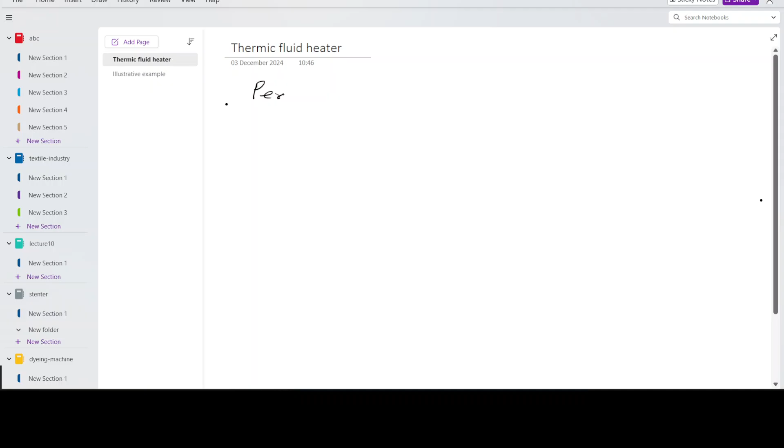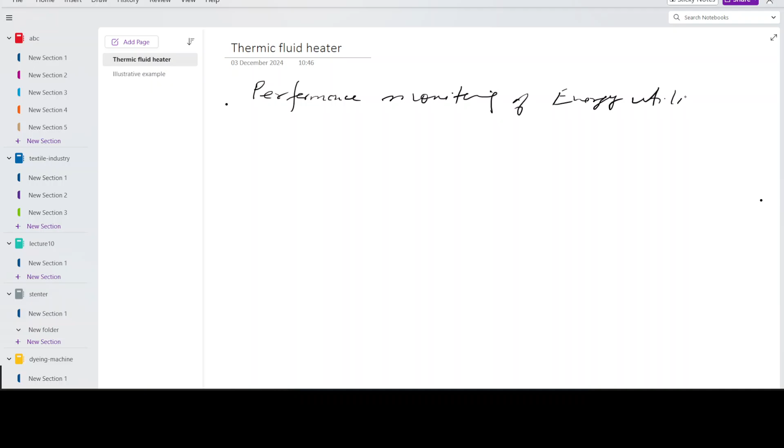Today we will begin performance monitoring of energy utilities in textile industry.

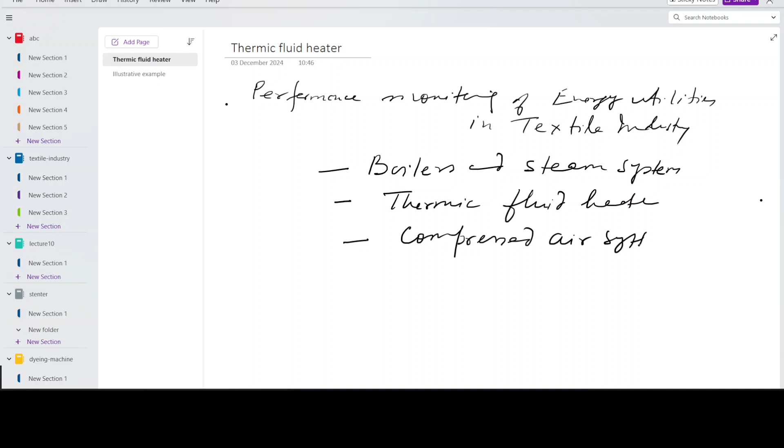Major energy utilities of textile industries are boilers and steam system, thermic fluid heater, compressed air systems, and humidification system.

Here in detail we will read about thermic fluid heater and humidification system. Today we are going to cover thermic fluid heater.

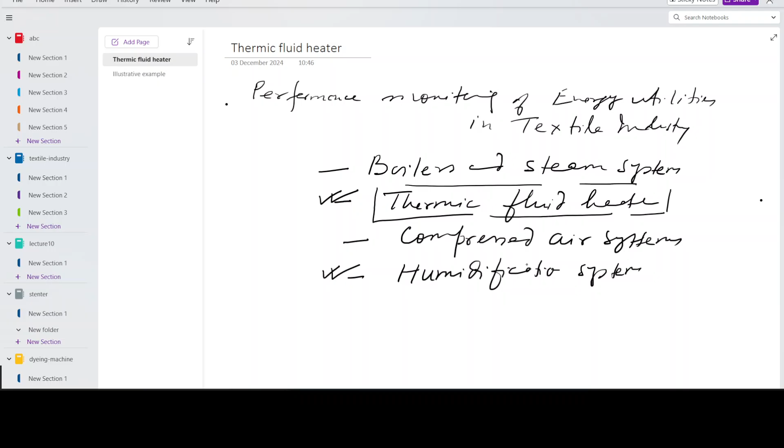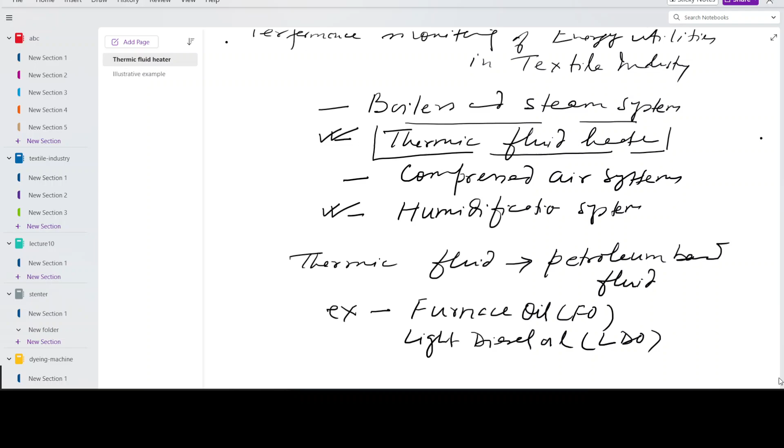What is thermic fluid? Thermic fluid is petroleum based fluid. Examples are furnace oil, light diesel oil, heavy fuel oil, and Hindustan Petroleum HP markets

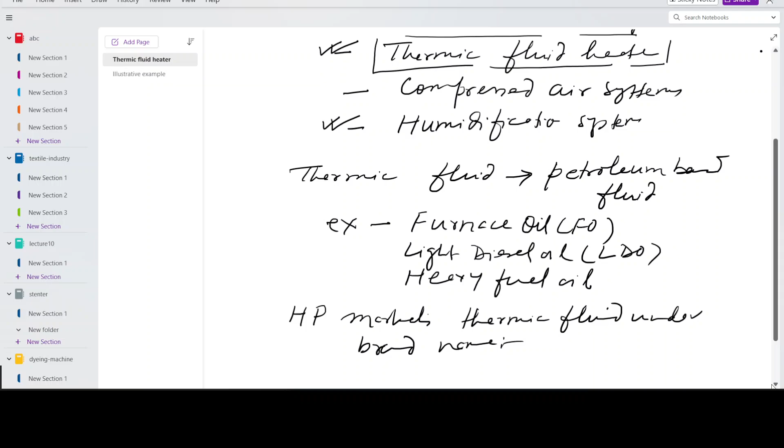thermic fluid under brand name Hytherm 500 and Hytherm 600. Hytherm 500 has maximum bulk oil temperature up to 290 degrees centigrade, and Hytherm 600 has maximum bulk temperature 320 degrees centigrade.

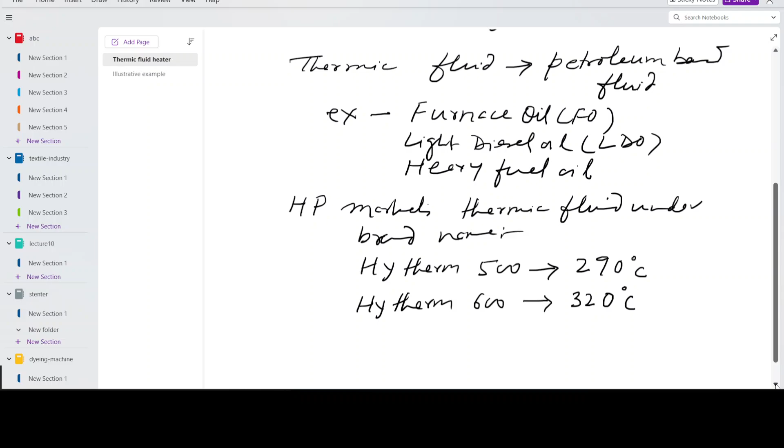This is about thermic fluid. Now we come to thermic fluid heater.

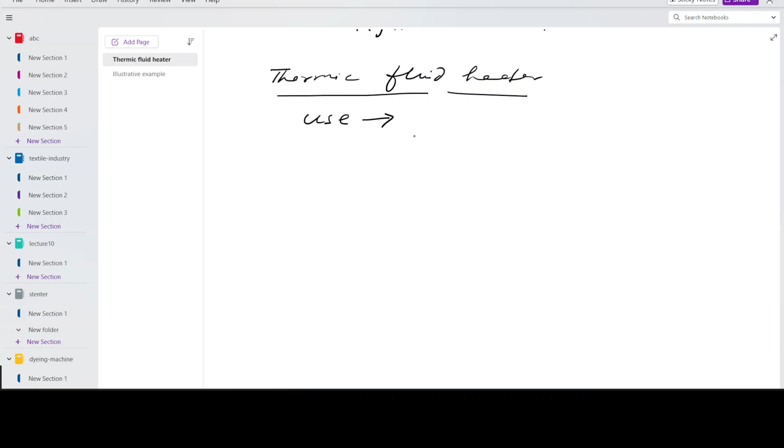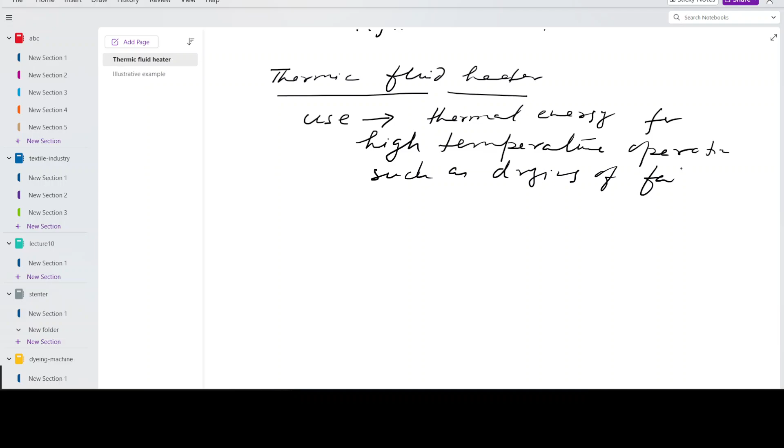Let us see its use first. Thermic fluid heater provides thermal energy for high temperature operation such as drying of fabric in stenter after dyeing operation in wet processing.

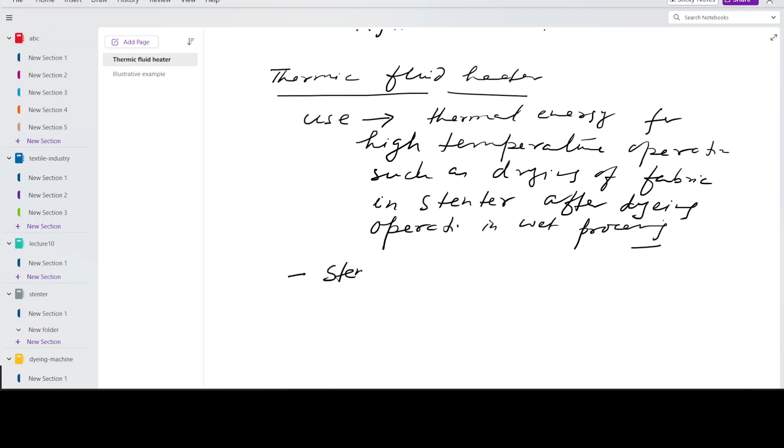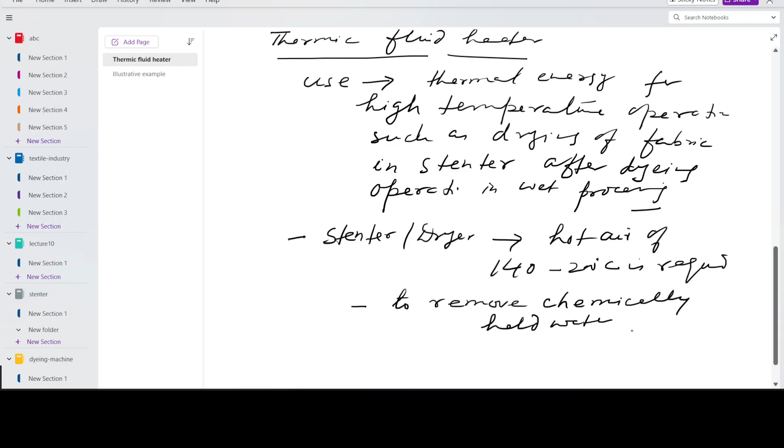In a stenter or dryer, hot air of 140 to 200 degrees centigrade is required. This may be for purpose to remove chemically held water from the textiles by evaporation, or physically or chemically set the textile material.

Now let us see the working principle of thermic fluid heater.

There are four stages. First is combustion, the combustion chamber generates heat.

Second is heat transfer. This heat generated from combustion is transferred to the thermic fluid flowing in coils or pipes surrounding the combustion area.

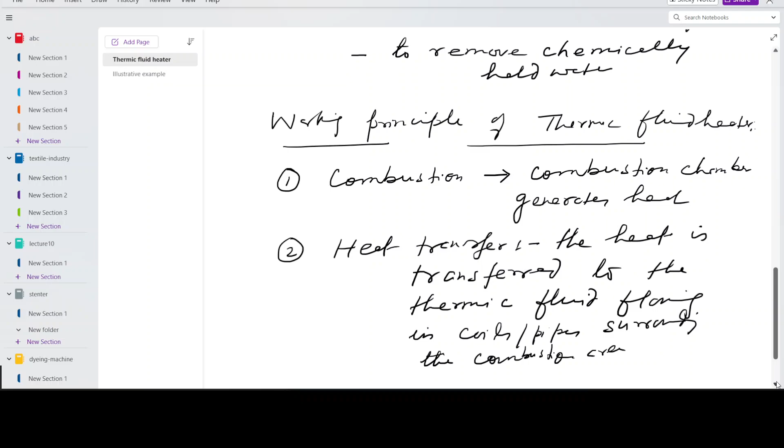Here, cold thermic fluid will enter and it will get heated in the combustion area. And third is circulation.

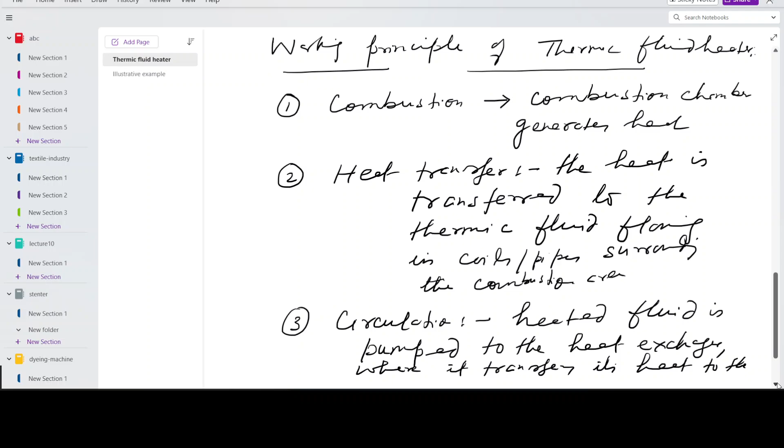Heated thermic fluid is pumped to the heat exchanger where it transfers its heat to the process,

and lastly it returns. Cooled fluid returns to the heater for reheat.

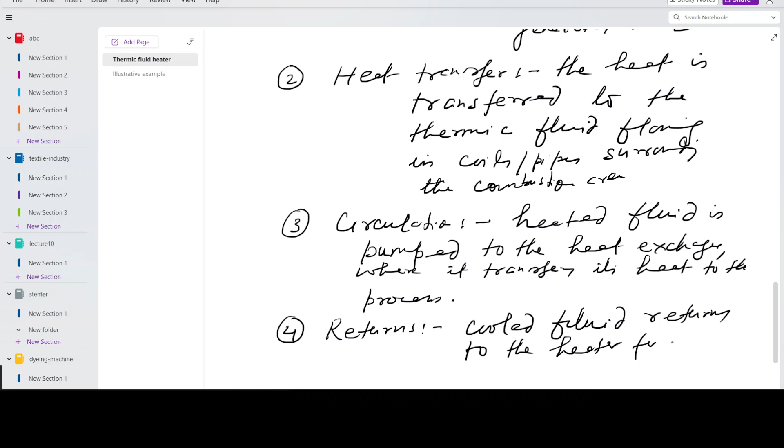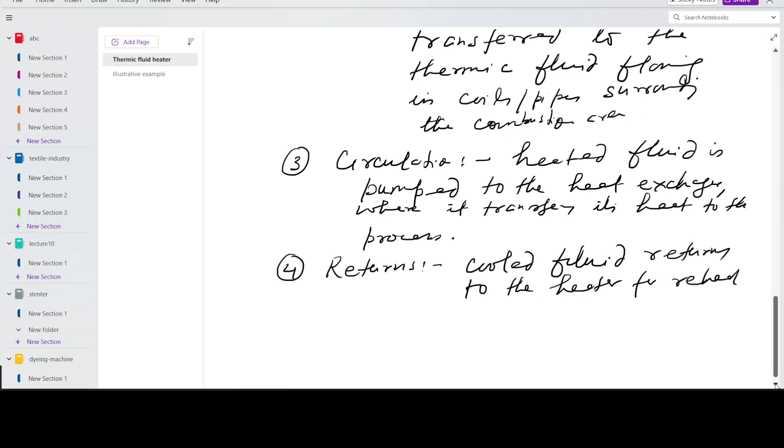Thus we see that this is a closed cycle operation, and as we know the efficiency of a closed cycle operation is always greater than steam boiler for the same purpose.

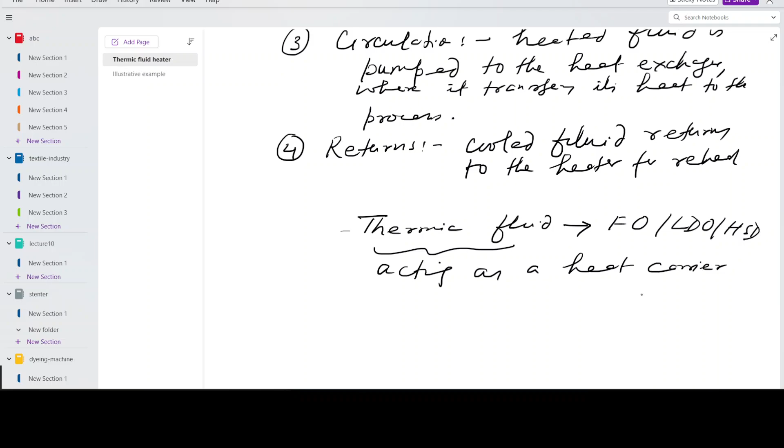I am explaining what we have seen in the working principle, just repeating those things. This thermic fluid is heated up in heater and circulated through the user equipment, and it transfers heat for process through a heat exchanger, and finally fluid returns to the heater. So this is a 4-step process we have seen.

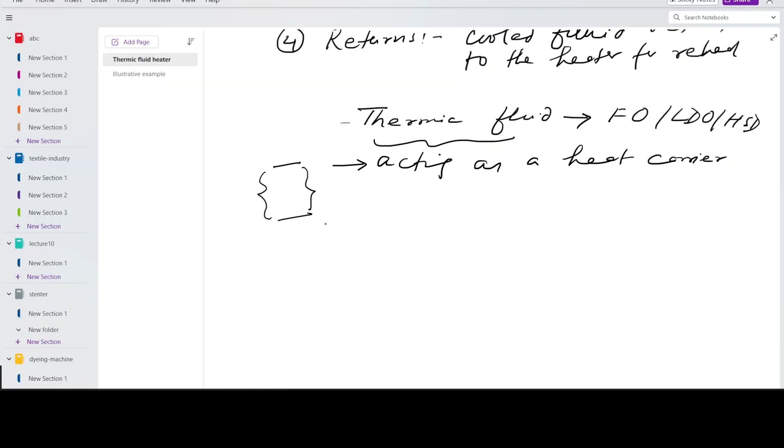First is combustion, then heat transfer, then circulation, and finally return.

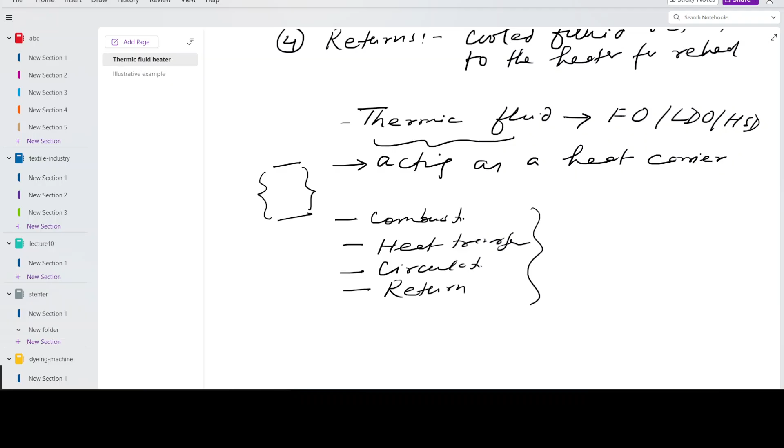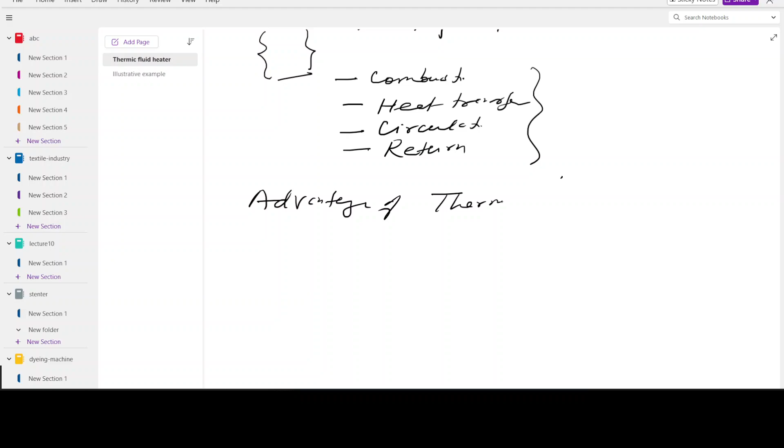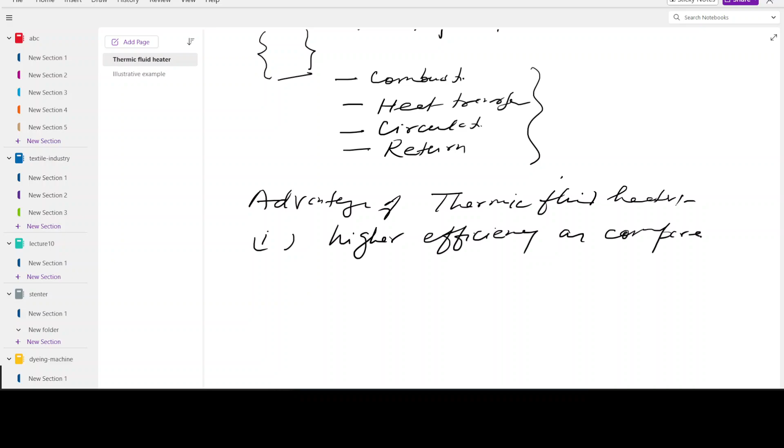What are the advantages of thermic fluid heater? First is it has higher efficiency as compared to steam boiler. Reason is obvious, because it is a closed loop operation.

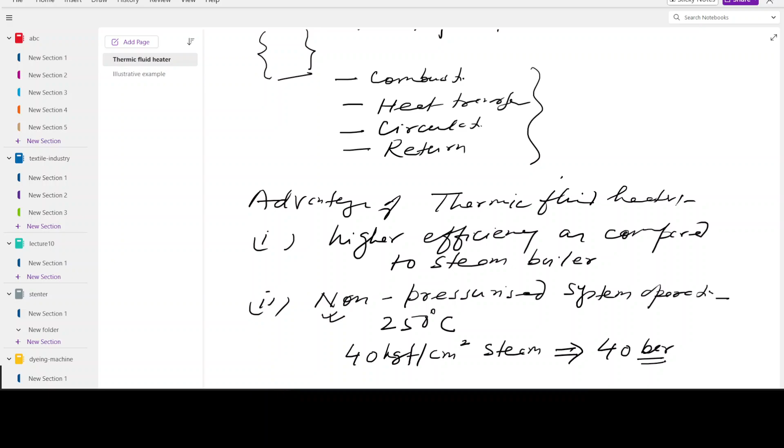Second important thing is non-pressurized system operation. Temperature around 250 degrees centigrade can be achieved through non-pressurized system operation, and the same operation in steam system will require 40 kgf per centimeter square steam, that is pressure of 40 bar, and here in thermic fluid heater it is non-pressurized system operation at 250 degrees centigrade, and this is for boiler. So it is advantage here, no extra pressure is required.

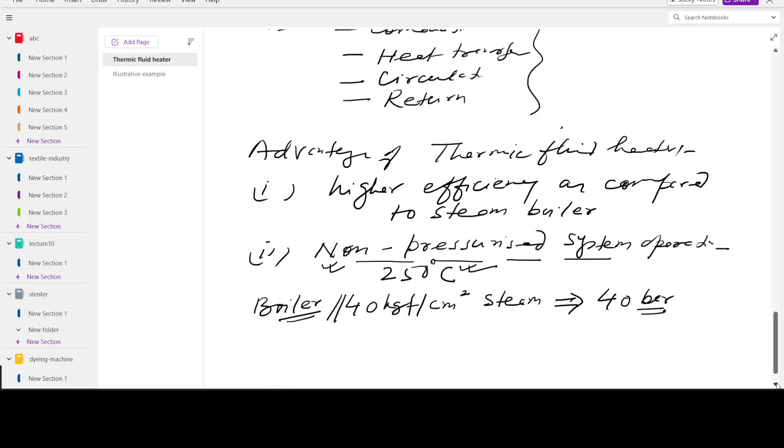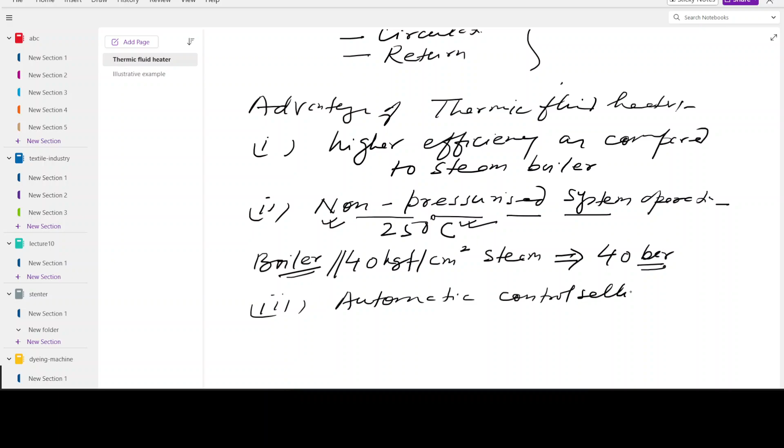And third important thing is automatic control settings. We can maintain desired temperature for desired time.

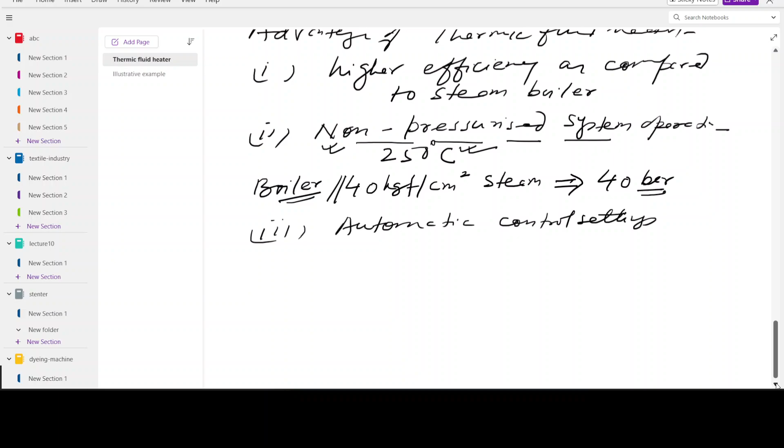We have just seen the operating principle of thermic fluid heaters and its advantages over steam boiler. Now coming to efficiency.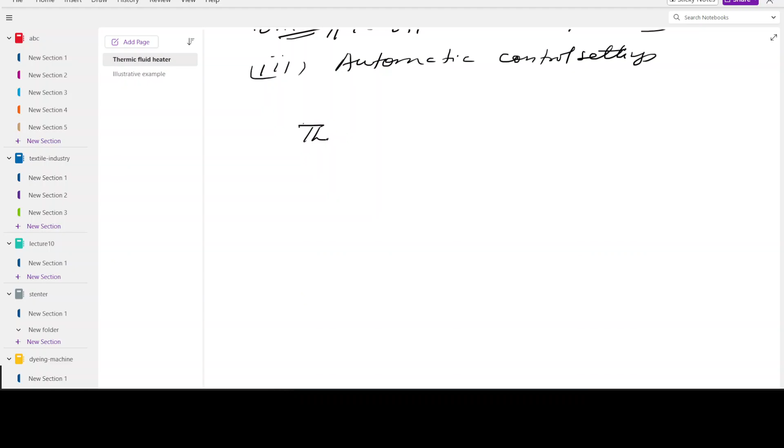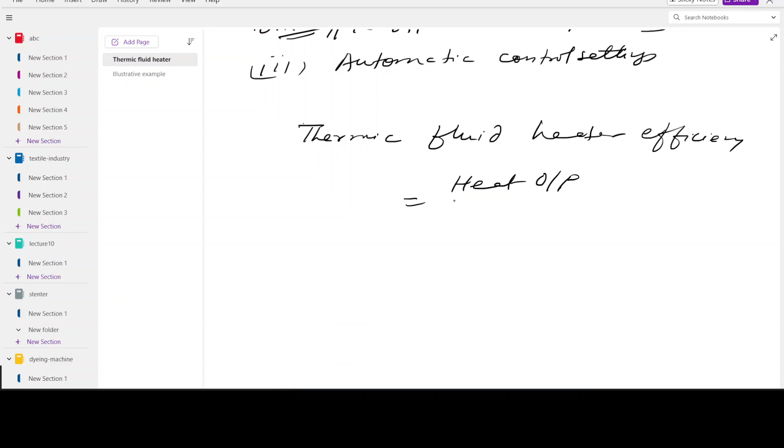Thermic fluid heater efficiency is equal to heat output divided by heat input, simple one, multiplied by 100 for percentage.

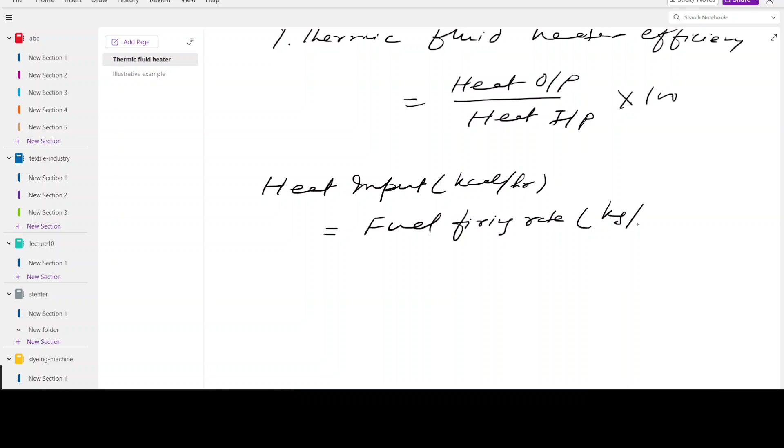And now let us see both these terms. Heat input, kilocalorie per hour, this is the unit. This is equal to fuel firing rate, how many fuel is getting fired per hour, and gross calorific value of fuel, this is in kilocalorie per kg. Thus we have found out heat input.

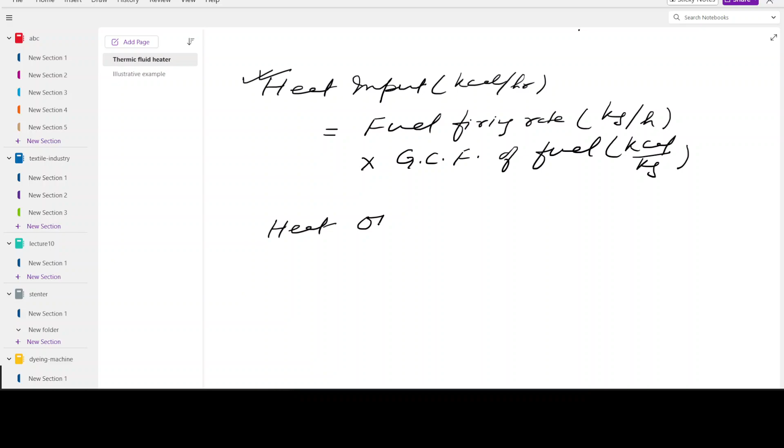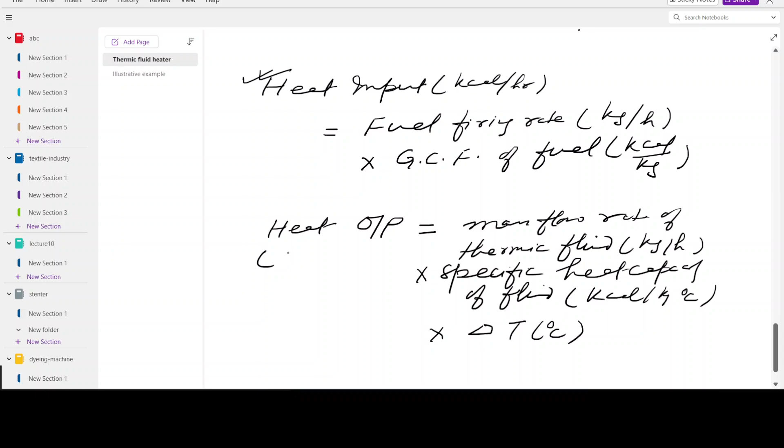This is the formula that will be used for heat input, and for heat output, heat output is mass flow rate of thermic fluid in kg per hour into specific heat capacity of fluid, its unit will be kilocalorie per kg per degree centigrade, and temperature difference in degree centigrade. So its unit will be kilocalorie per hour.

Now we have heat output, heat input, and so we can find out thermic fluid heater efficiency. With this information, we can find out thermic fluid efficiency. Now we will see its application through an example.

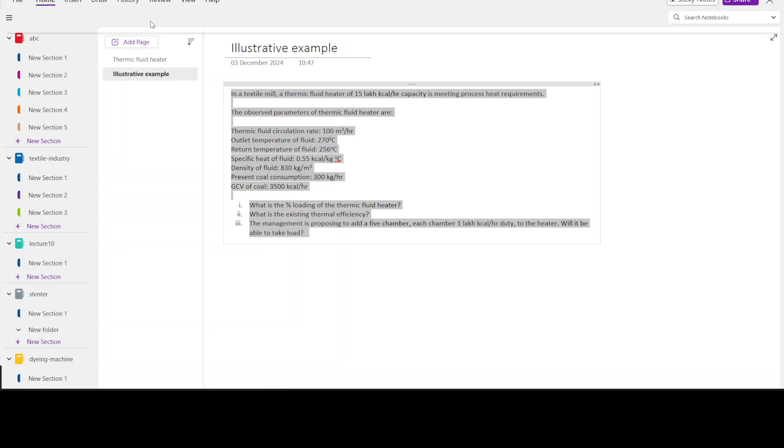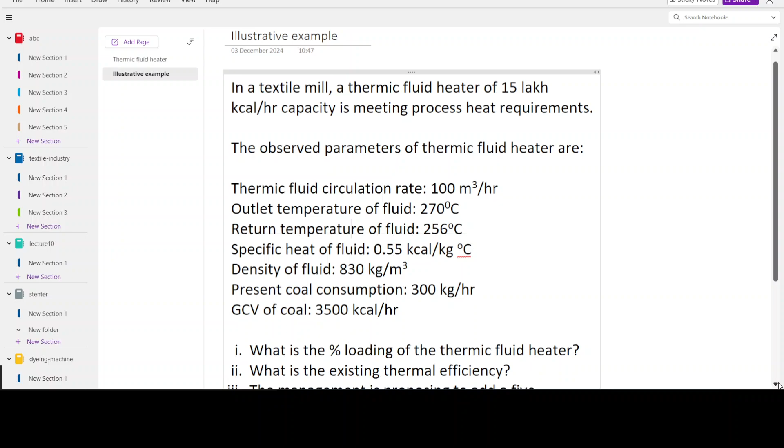Here we have a question. Just I am increasing its font so that you can see it clearly. The question is, in a textile mill, a thermic fluid heater of 15 lakh kilocalorie per hour capacity is meeting process heat requirements. Here the capacity of fluid heater is given. The observed parameters of thermic fluid heater are: circulation rate is given as 100 meter cube per hour.

We have volume per hour, outlet temperature of fluid and return temperature of fluid. We can find out delta T here, 270 minus 256 degree centigrade. Specific heat of fluid Cp is given here, and density of fluid has been given here.

Using this volume per hour and density, we can find out mass flow rate, which is equal to volume per hour into density. For finding heat output, we will need mass flow rate, which we can find out very easily here. Specific heat of fluid is already given and temperature difference is already given, so we can find out heat output very easily.

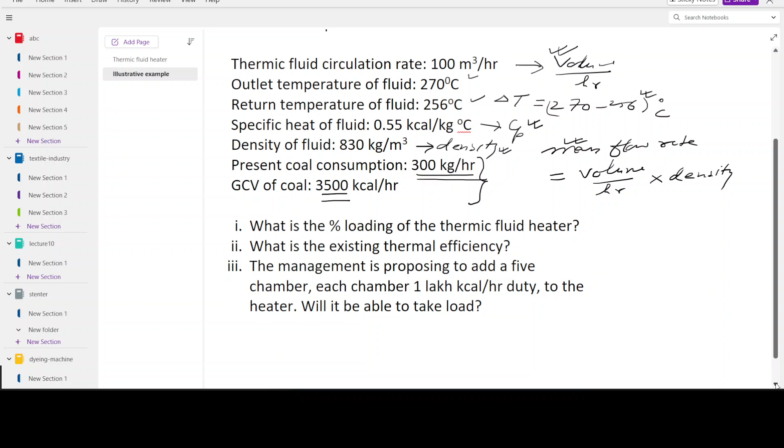We have been given coal consumption 300 kg per hour, that is the fuel firing rate, and gross calorific value of coal is also given. So we will find out heat input also. Now we are in a position of finding heat output and heat input both. First question is asking what is the percentage loading of the thermic fluid heater? We can find it out very easily.

First of all, find out heat output. Heat output is equal to mass flow rate into specific heat capacity of fluid and temperature difference. Mass flow rate is given: volume per hour 100 meter cube per hour into density 830 kg per meter cube. We have found out mass flow rate. Specific heat capacity given is 0.55 kilocalorie per kg per degree centigrade, and temperature difference is also given here, 270 minus 256.

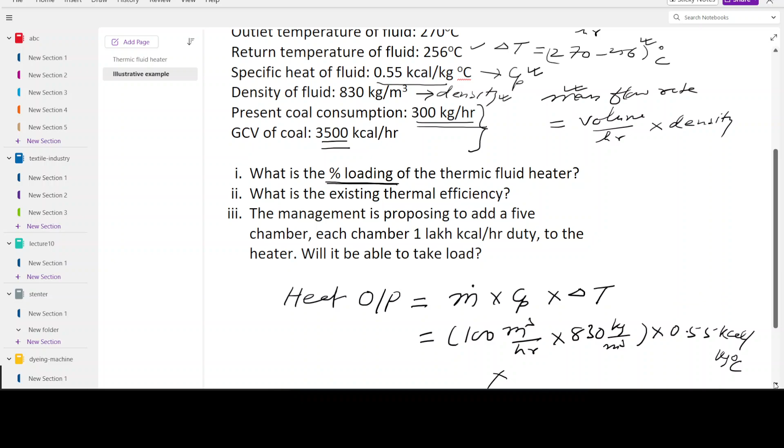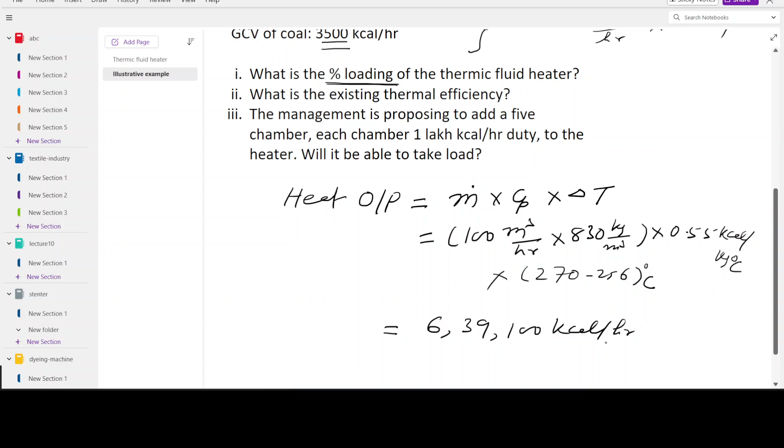When we multiply it, this comes out to be 6,39,100 kilocalorie per hour. We have found out heat output. Percentage loading is equal to heat output divided by capacity of thermic fluid heater.

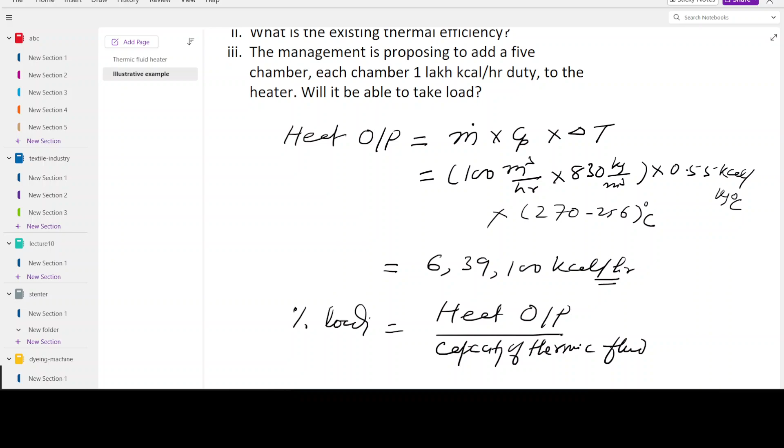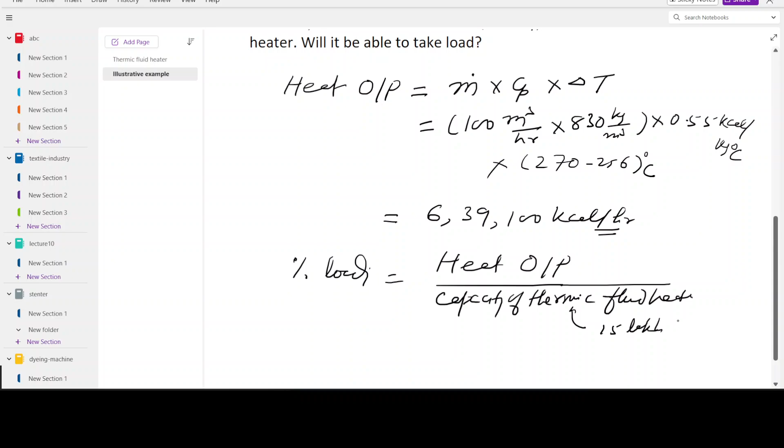In the very beginning of the question, capacity has been given as 15 lakh kilocalorie per hour. You can see this is the capacity, 15 lakh kilocalorie per hour. So put these two values: kilocalorie per hour divided by 15 lakh kilocalorie per hour, multiplied by 100 for percentage. This comes out to be 42.60%.

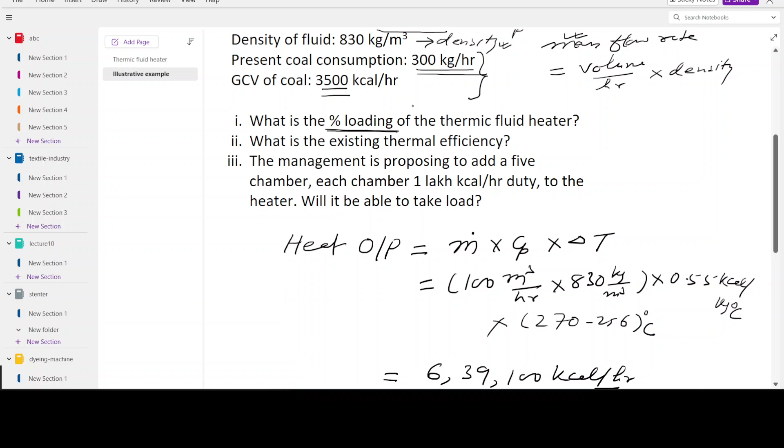Second question: what is the existing thermal efficiency? For thermal efficiency, we have already found heat output is equal to 6,39,100 kilocalorie per hour. We have to find heat input. Heat input is fuel firing rate, which has been given as 300 kg per hour, and gross calorific value of coal, which has been given as 3500 kilocalorie per kg.

This comes out to be 10 lakh 50,000 kilocalorie per hour. So we have both heat output and heat input. Efficiency of the heater is equal to heat output by heat input. This will come out to be 6,39,100 divided by 10,50,000.

Units are kilocalorie per hour divided by kilocalorie per hour. We will multiply by 100 for percentage efficiency. This will come out to be 60.86 percentage. We have found out efficiency. The third part of the question says the management is proposing to add 5 chambers, each chamber 1 lakh kilocalorie per hour duty, to the heater.

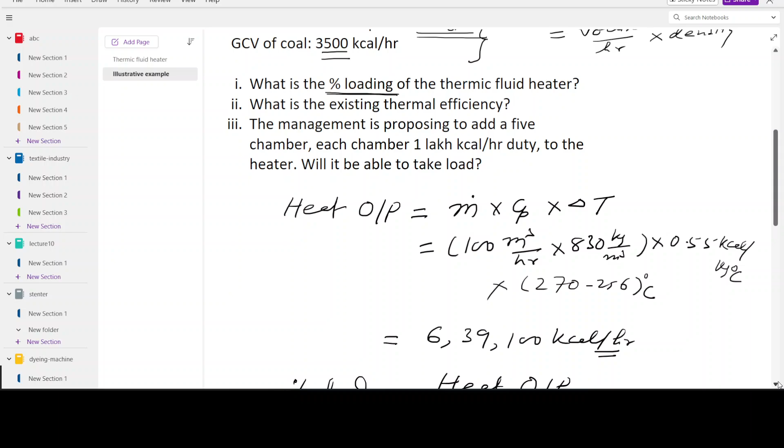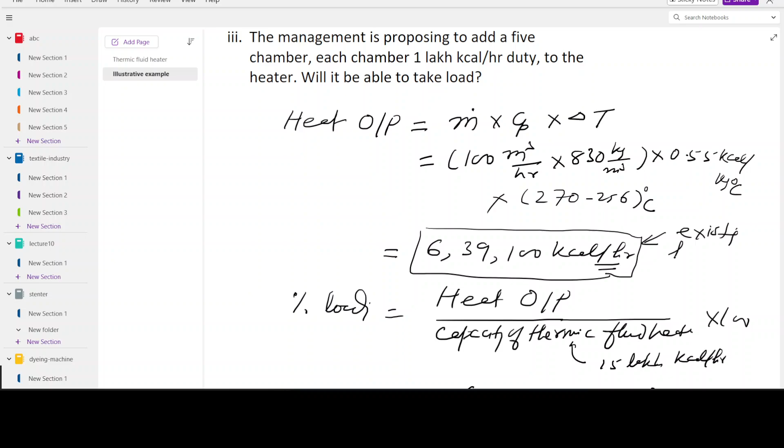Will it be able to take the load? Existing load is 6,39,000, this is the existing heat load. Apart from that, management wants to introduce 5 heat chambers of 1 lakh kilocalorie per hour capacity each. So this is the additional heat load.

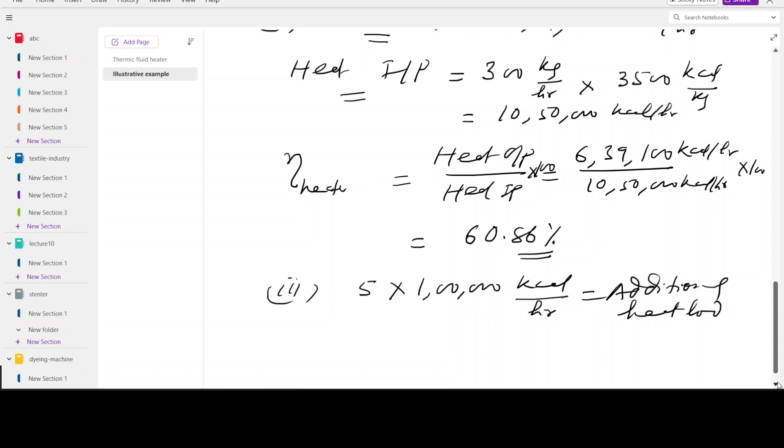So total heat duty with the new loading is equal to the existing load plus 5 lakh, these two components, in kilocalorie per hour. This comes out to be this much. And as the capacity of the thermic fluid heater is 15 lakh kilocalorie per hour, it will be able to take the load. The answer is yes, it will be able to take the load.

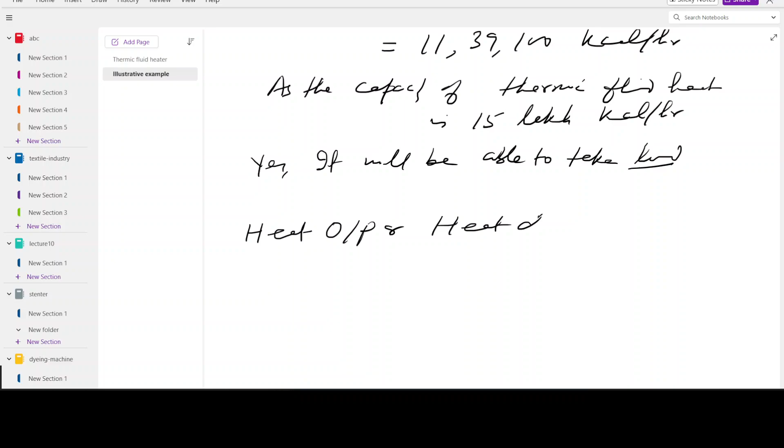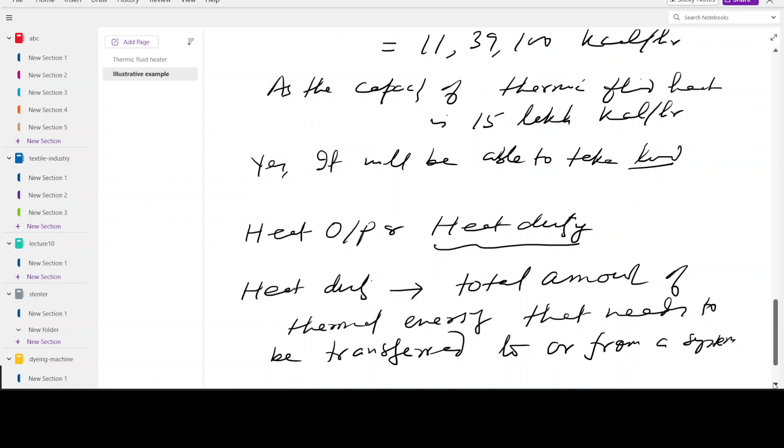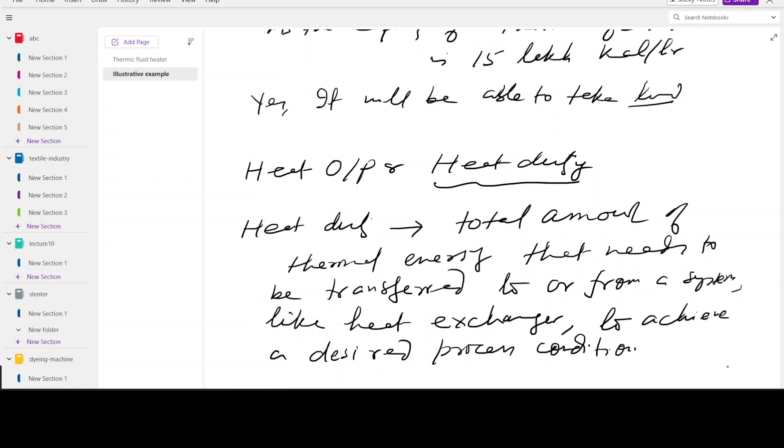Just for completeness, I want to clarify heat output or heat duty. Heat duty is the total amount of thermal energy that needs to be transferred to or from a system like a heat exchanger, to achieve a desired process condition. Desired process condition means desired temperature and pressure.

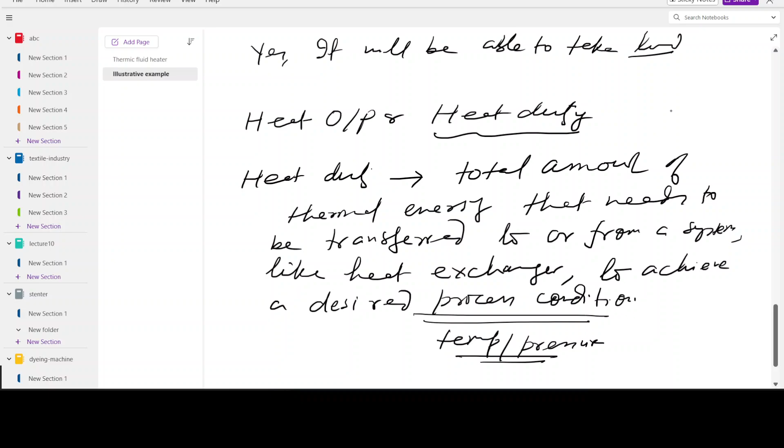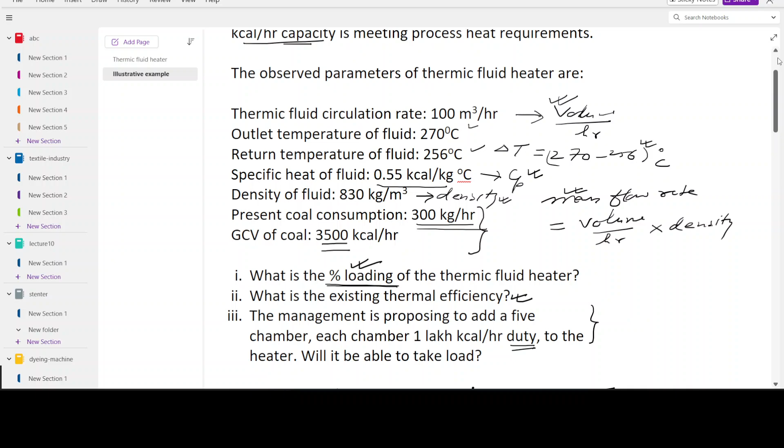In this problem, what we have done: we found out heat output and heat input, which gave us thermal efficiency, and heat output gave us percentage loading, because we know the capacity of the thermic fluid heater in this textile mill. Then it was said that 5 new chambers are being proposed, each of 1 lakh kilocalorie per hour duty. Will that be feasible? Will it be able to take the load? The answer is yes, because the total load after adding this proposed load is below the 15 lakh kilocalorie per hour capacity. So it is feasible.

Thus, in this lecture, we have seen the performance of the thermic fluid heater. In the next lecture, we will come across the humidification system. Till then, thank you.